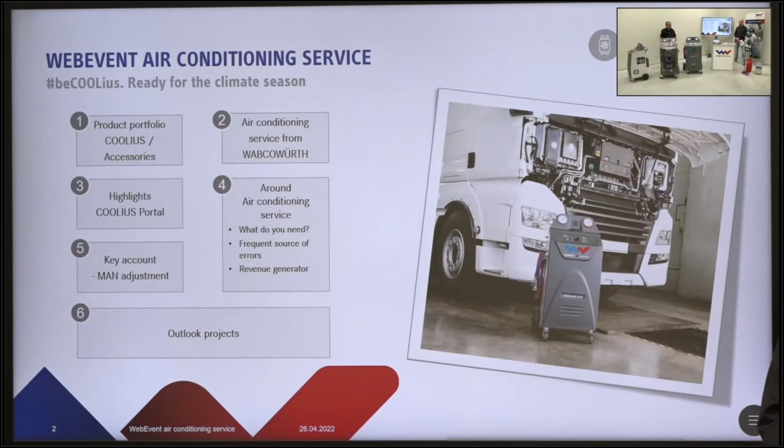Before we start, Uwe, can you tell us why it is very important to do a service job on the AC system? This is a very good question, Marvin. I'll try to answer it in short. Everybody has a fridge at home, and I'm frequently asked why I need to do a service.

I never do anything at home to my fridge, even after 20 years, I just turn it on and let it run. That's true, and at the same time this is the reason why there is a core difference. We have a so-called open system, an open structured system fitted into a passenger car or a truck or any vehicle. In comparison, at home in the fridge, we have a totally solid and hermetic system.

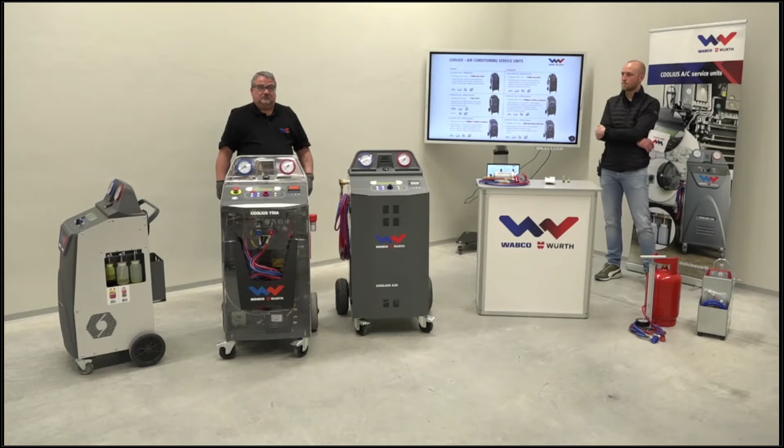Hermetic means that we have only soldered or welded connections, so this means it's absolutely tight - no molecule can escape this system. In comparison, a vehicle has many fittings on board, up to 20 different fittings, only sealed by an O-ring or a gasket, and we have a dedicated loss of up to 10% of the refrigerant per year, which means we are losing the refrigerant.

At some fine day we will not be able to operate the system again. And at the same time, as we are losing the refrigerant, environmental air, including humidity, is entering the system and accumulating water inside it, which gives another problem because we are producing acid, and the acid is of course also harming the system from within. So we have changes in the chemical composition, which lead to a lower cooling performance overall. So a lot of problems will happen.

And we have a filter dryer, which is only dedicated for a small lifetime because it only can absorb a certain amount of water and filter a certain amount of particles out of this refrigerant until it is saturated and needs replacement. So this is, in short, why we need to have service to a mobile air conditioning system.

Everyone who works in a workshop has heard about the refrigerant. What is the background behind the refrigerants? Why do we have two on the market? And what will the future bring?

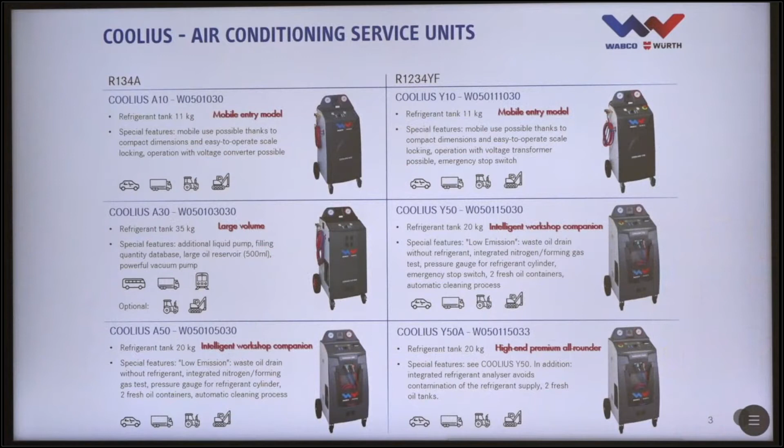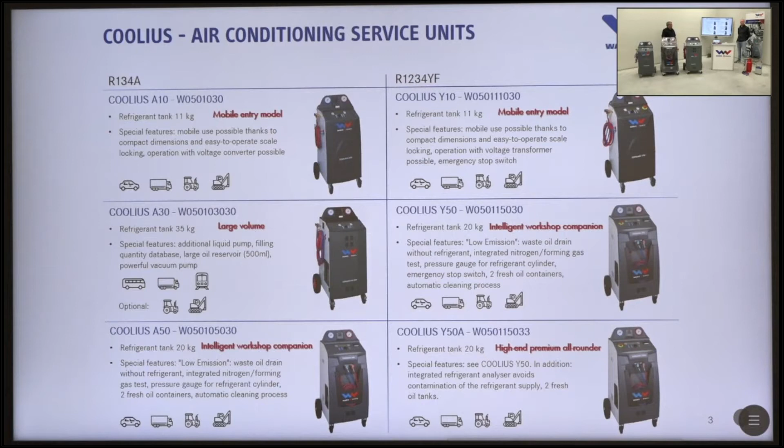Another important thing regarding AC service in general is having the perfect or suitable accessory. We at Wabco Würth have a lot of accessories in the portfolio, and we will present you today the most important ones. For example, we have a flushing kit.

Uwe, why should we have a flushing kit? Why is it necessary for the workshop, and when should we use the flushing kit?

I would even start a little earlier. When the vehicle comes into the workshop, we already need accessories. As mentioned earlier, we have these small identifiers, for instance. Identifiers are necessary to really make sure that the vehicle I'm about to service now has more or less adequate refrigerant on board.

Then, analyzing this refrigerant, I would also strongly recommend using a simple looking glass cylinder, which gives me the opportunity to look at the appearance of the refrigerant and the oil. This gives me information about the amount of oil, the oil-refrigerant ratio, and whether it's still within the permitted range. I can also make sure I'm not having overheated oil, which changes color to brown or black running around in the system, because from that moment we are not talking about a simple service, but a full-scale repair.

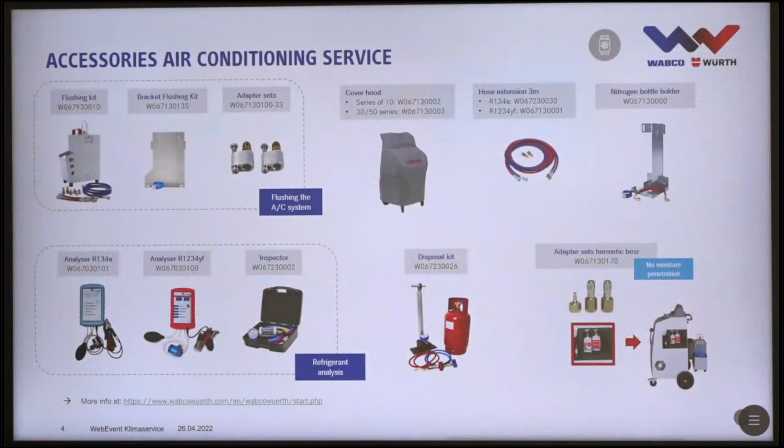And if we are talking about wasting refrigerant, we also need to have this disposal kit.

Yeah, this would be for me the basic equipment before I start to offer AC service in a professional way.

Let me add some information regarding the flushing process. We have the suitable adapter set for bypassing the compressor in our portfolio. You will find more information about the flushing process on our homepage, which I'll add here - why it's necessary, as Uwe mentioned, and which adapter set you need for which compressor type and which car or vehicle type.

Yeah, we have some other accessories, for example the cover hood and the hose extension. The hose extension we need, for instance, if we do the job on a construction machine or an agriculture machine, because there the AC system is very hidden and partly roof mounted. You need to take a ladder to go up on the roof and really reach the system, so the standard 3 meter hoses are not perfect - you need an extension.

Then, as you see here on the Y50A, we have the nitrogen bottle holder on the back side of the Y50A.

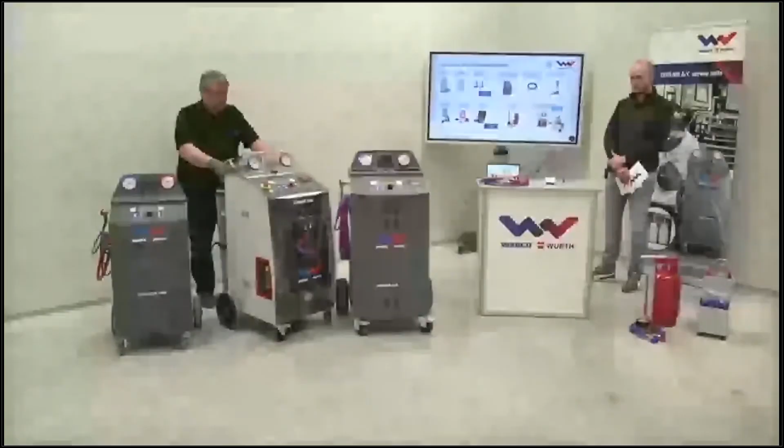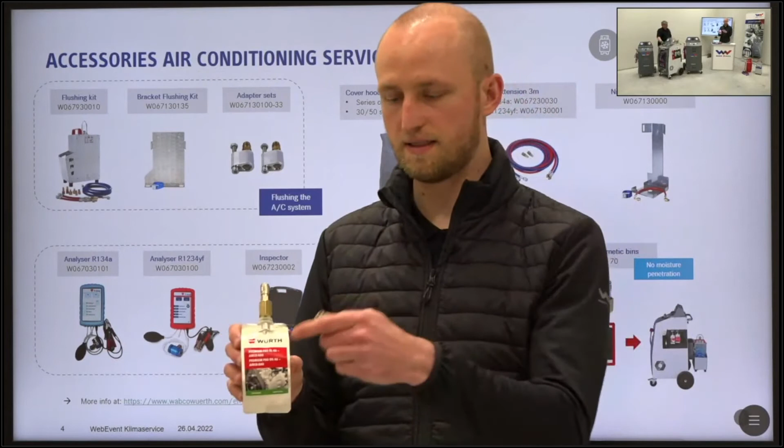And one very important new accessory is the adapter set, or adapter sets, for the hermetic bins. The hermetic bins come from our partner Würth, and with this adapter set, which I have here, you can fix the hermetic bin directly to our machines. The adapter set consists of 3 adapters - one for PAG oil, one for POE, and one for UV dye.

Let me show how you can fix the echo bag, as we call it internally, to the machine. Remove the old oil bin, and then you can mount the new one through the adapter directly to the machine. You can do this with PAG, UV, and POE.

And the biggest advantage of this solution is that no moisture will penetrate into the AC system. Because if you have moisture in the AC system, the conductivity will increase, and this means the oil will not be usable anymore.

But you've mentioned another very important thing that saves a lot of labor time, because part of the preparation is to daily check the container and dispose of the oil which isn't okay anymore, which has collected too much humidity. With this solution, you can leave it there until it is empty.

Yeah, a mixture of refrigerant, moisture, and oil will lead to a substance, and this substance is very dangerous for the components in the AC system. Absolutely. So these adapter sets are now available here at Wabco Würth, and I think this is a very good solution, also regarding e-mobility.

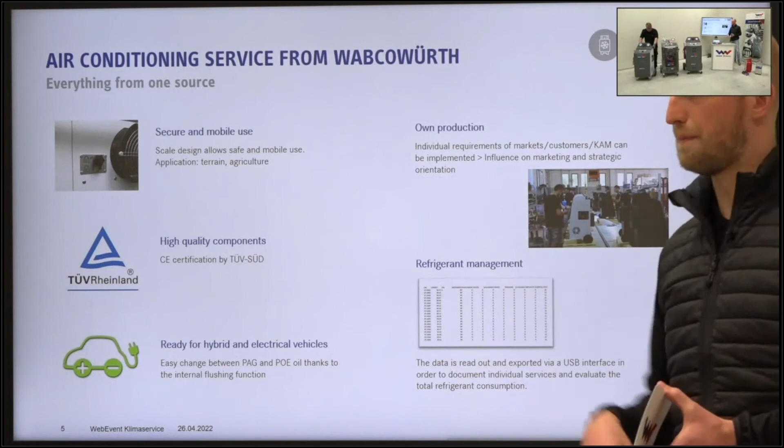So far for the accessories. What we've forgotten now, Uwe, is the secure and mobile use of our devices. We have on the back side a scale design with this scale locker - we call it scale locker. You can unlock or lock the scale inside the device.

Yeah, exactly. This is a very simple and tool-free solution which can be used at any time you like. So this means if I put it upwards here, I lock it, and now I can go over a bumpy road or a bumpy yard.

I can transport this device on a van, on a bad road, without harming the scale, because the scale is rated 60 kilograms. If I give it too much shocks, I can damage this scale transducer, and in this case I can avoid this. And now you see, within 3 seconds, I'm operable again.

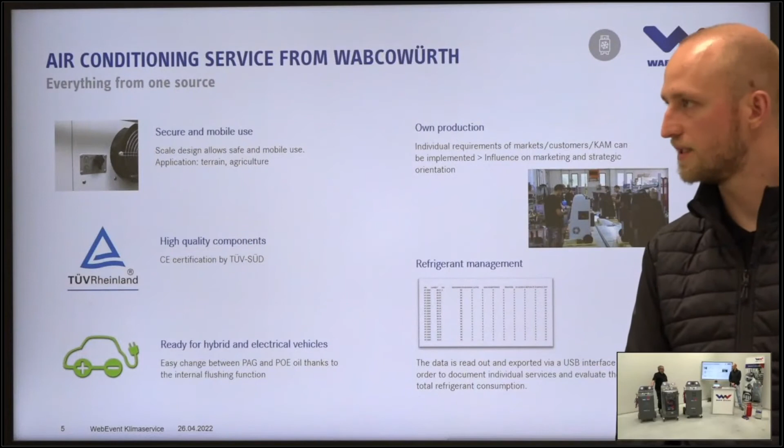Furthermore, we have very high quality components in all of our devices. We are certified by TÜV Süd, and as Uwe mentioned, we are ready for e-vehicles and hybrid vehicles because we have the internal flushing function.

Then, what we also have is our own production in North Italy. That means we can fulfill the requirements of the market and of the key account. We can customize the products - for instance, the MAN product, which I will explain later.

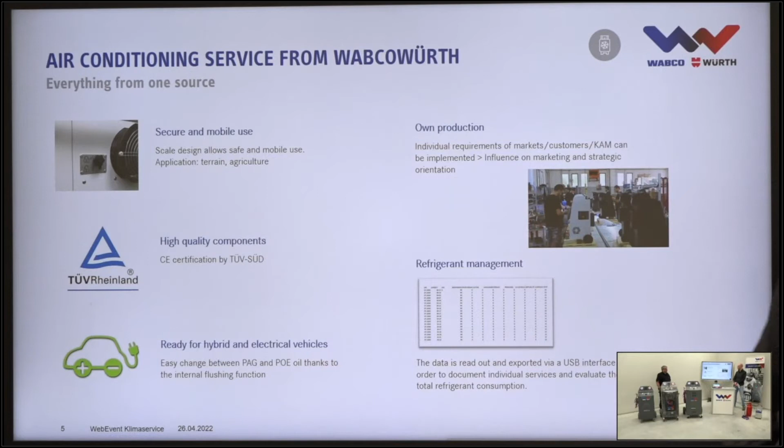And we have integrated refrigerant management. With this function, you can document the service jobs, how much refrigerant you use per service, and this is also important for regulation.

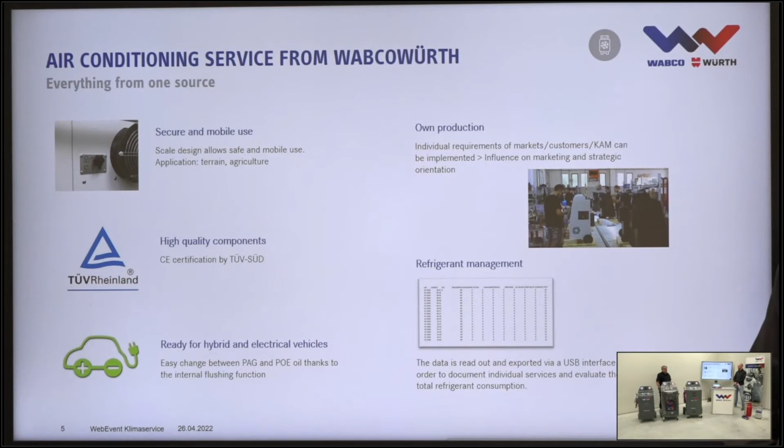We have two big points here: we can of course fulfill all the environmental regulations, and we can do a full cost calculation, because you can sum up all the refrigerant purchased and see what you have sold out - this is, I think, very good transparency for the accountant. Of course, yes.

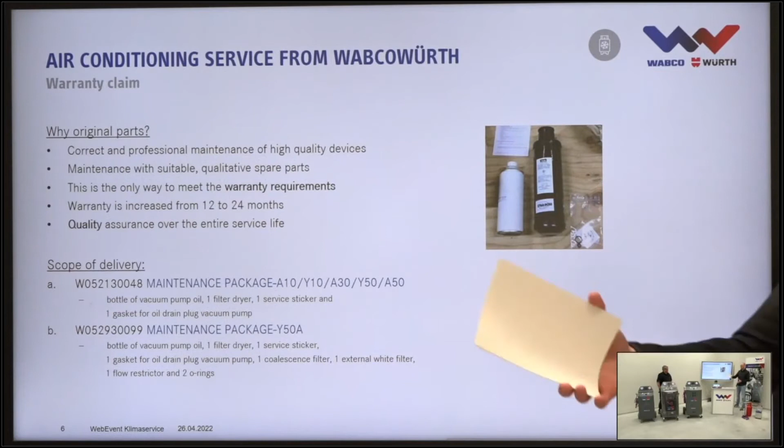Another important point is the warranty claim. Why should you sell the original parts from us, from WabcoWürth? A high quality product like the AC machines needs maintenance, and with our maintenance package you can carry out a correct and professional maintenance. With original parts, this is the only way that you meet the warranty requirements, and the warranty duration increased from 12 to 24 months. This assures you high quality over the entire service life of the machine.

You can order the maintenance package under the following article number, which you see here in the presentation. The difference between the two maintenance packages is only that in the package for the Y50A we have additional parts for the refrigerant analyzer.

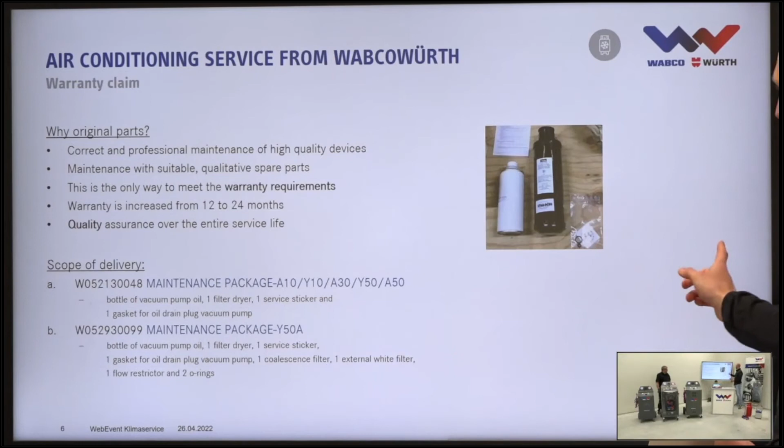Now, what is very important for you is the COOLIUS portal. I will show you the advantage of this portal. In summary, the portal is a cloud or web browser where you can find a helpful overview like the manuals or instructions. You can find an overview about the spare parts of our AC machines, and what is very important, you can download the current software update and generate maintenance and flushing codes.

With this access you can generate a flushing key, you can generate the maintenance key, and you can download manuals in different languages. You can see what the current software update is and compare this update with the update on the machine, and then you can download the update and play it on the device via the USB port.

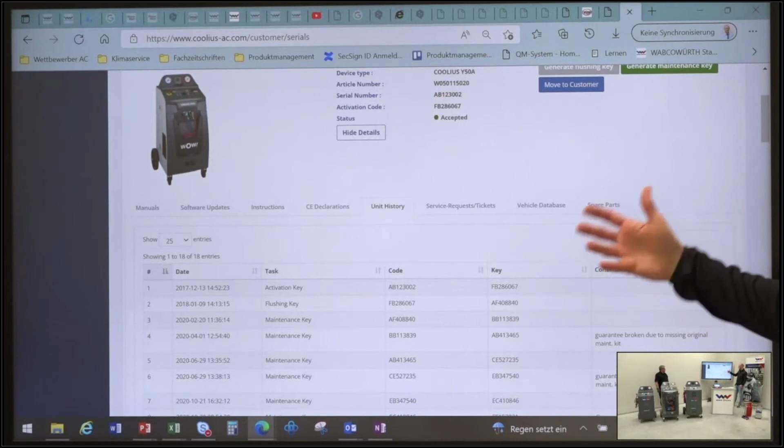Here you have the options to download different instructions, for instance the instructions of the flushing kit. You can download CE declarations, you can see your unit, and you can see your history of the generated keys - for example, how many maintenance keys I have generated in the past, and things like this.

What is also important here is that you have a direct link to the parts manager. Here you see the parts manager of every device, A10 to A30, and you can order the spare part directly here if you need it. So far, that's our COOLIUS portal.

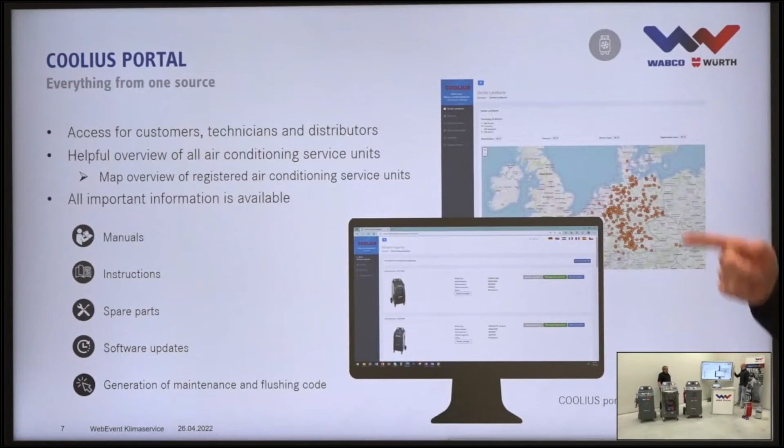Shouldn't we mention the bus database as well? That's a good point, Uwe, of course. Let me show you this function.

If you have an A30, let me show here, you have the opportunity to select the right refrigerant quantity and the right oil type. This depends on the AC system built into the bus - you can select your AC model, your AC manufacturer, your bus model, and the bus manufacturer, and then it shows which combination of the AC system is possible. We are very often asked why we do this on the web and not on the machine.

You see, we have in total more than four different search items, which is necessary because the variability on a bus is comparable to a building. You can build into your building whatever kind of heating plant you want to have, and the same situation applies here with the buses.

This means you can configure such a new bus really according to all of your needs. You can change the cooling performance - you can have only the driver's cabin cooled, or you can have everything cooled, and this makes a very high variation, which is why this database is really unique. We cannot, of course, do this on a simple device like an AC machine.

But here, this is absolutely adequate, and you have access at any time of the day to find the right system, saving lots of time searching the web or asking dealers or whatever. So it's a very good opportunity for you to find the right refrigerant amount and the right oil type.

Here you see the most important consumables which you need for a first air conditioning service: of course, the right refrigerant, the right oil, and the adapter sets for the extraction of the refrigerant bottle. And as you see directly on Uwe, the personal security equipment.

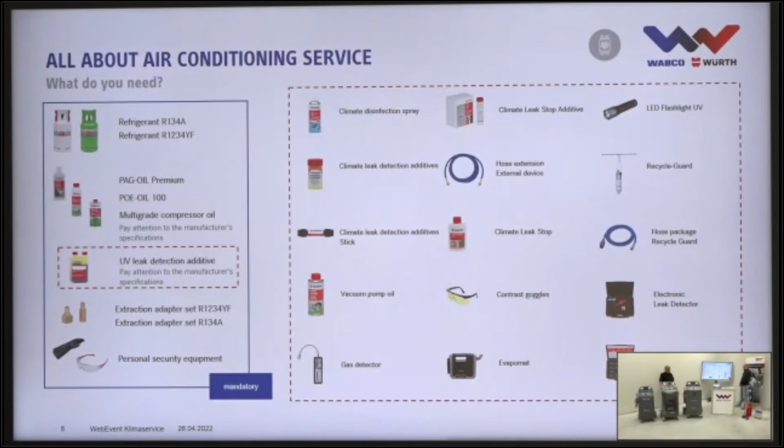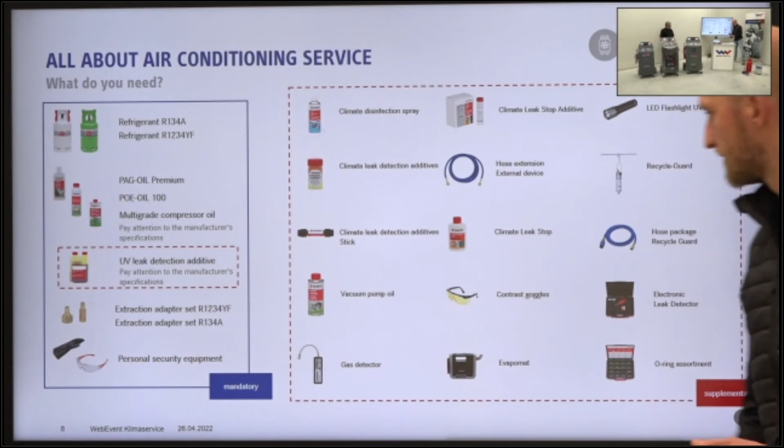Then we have other supplementary accessories in the portfolio of WABCO WÜRTH, for instance things like the leak stop additive. We have accessories for leak detection, and the Evapomat is for the purity in the cabin of the car. The gas detector, for instance, is to detect the forming gas if it comes through a leakage of the AC system.

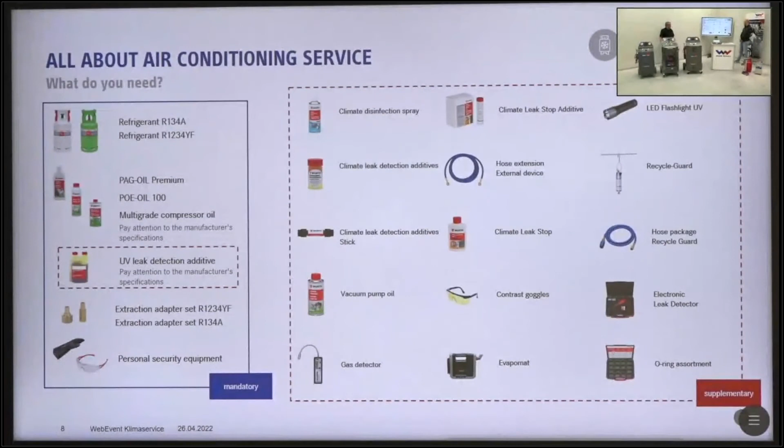Yeah, if you're a beginner in the area of AC service, you ask yourself what is most easily damaged, what I can do, or what can occur. So Uwe, can you tell us what are the most frequent sources of error which will occur if you do the job?

Of course, there are opportunities to do something wrong. Today not so much, but in the past there were issues. You need to have the certificate of expertise or competence, which is mandatory according to the EC regulation, valid in all countries of the European community. So the certificate should be with you, otherwise you risk a very high fine. Because in this expertise, you are taught how to handle and treat this refrigerant, and what safety measures for personal and environmental safety are necessary.

Always work with protective equipment, because this refrigerant has a very bad impact on your health if you swallow it, breathe it, or get it into your eyes. You need to immediately see a doctor, and you can be happy if no further damage has occurred.

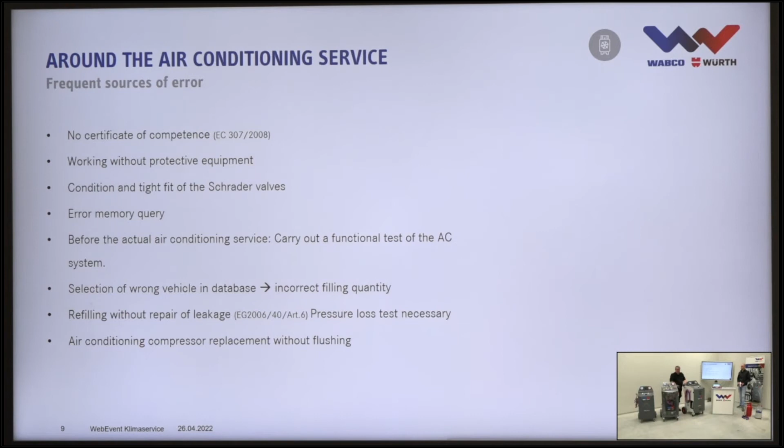You should also observe the condition of the Schrader valves - we have the service couplers here on the parking position, also on the passenger car or any other vehicle. Make sure this is not the source of a problem, you should always check if it's dusty or if the protection cap is missing - we need to clean it before coupling on and starting the service. Otherwise you transport substances and particulate matter into the system which definitely does not belong there.

Also check whether it is fitting tightly, use the special key and tighten it if necessary, because this is also a source of error, very often overlooked. If you disconnect the vehicle and the customer leaves and comes back after 4 weeks, the further issues are all on your expense because you have to grant warranty.

Before we do anything on the passenger car, it's not always about the refrigerant amount or quality. In the meantime, every AC system is controlled by OBD, so we should also check the fault code memory for anything unexpected. Because if you do the service with the machine, the customer naturally expects the AC system working properly after visiting the workshop. If there's a problem requiring repair rather than just service, we should have the information first and discuss this with the customer before any damage happens.

The condition of the system as such should be checked in best practice together with the customer. Go there with the customer, turn on the engine, turn on the AC at full performance, check the blowing temperature, then evaluate together with the customer which corrective measure needs to be taken to get the system back into full operation. Transparency is very important.

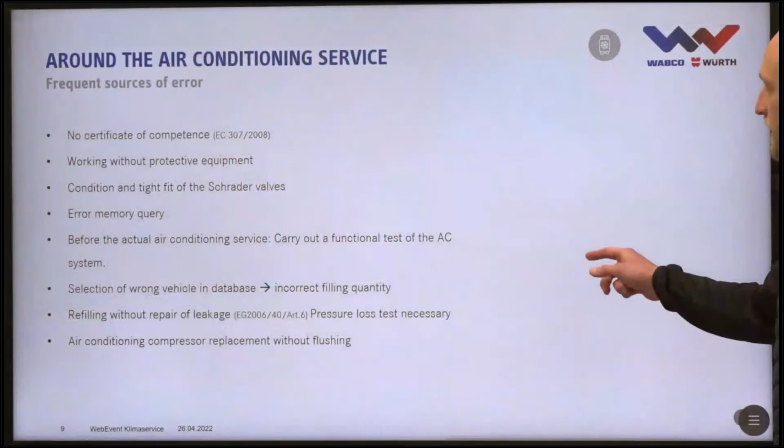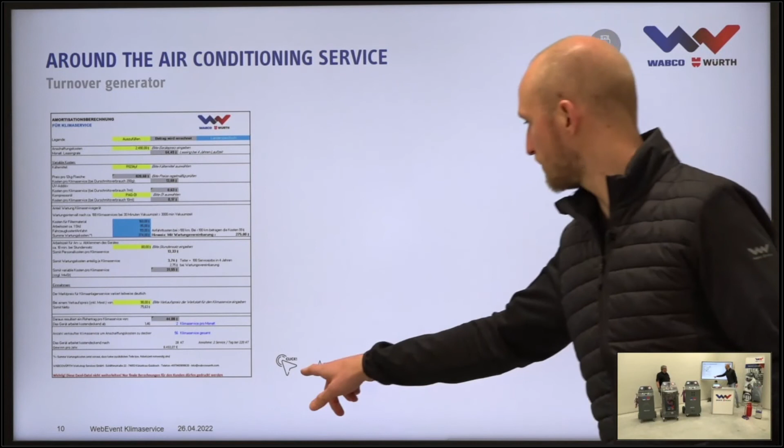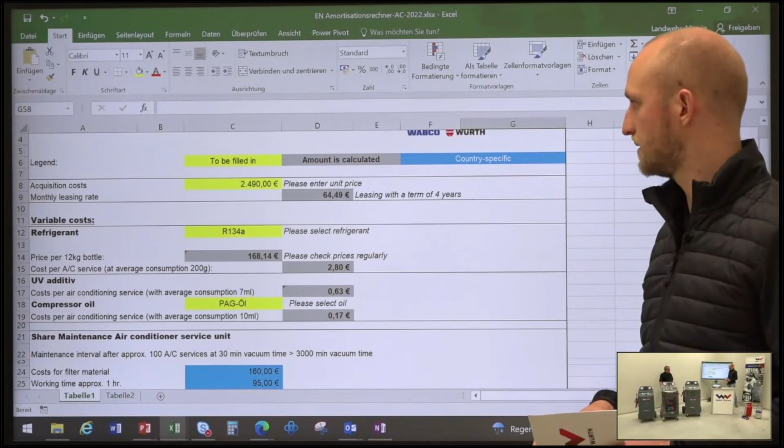Then in the next columns you have the variable costs. The variable costs consist of the refrigerant, the UV additive, and the compressor oil. But the amount of the UV additive and the compressor oil is much lower than the amount of the refrigerant. Then you see the cost of maintenance of the air conditioning machine.

As we explained in the presentation before, maintenance is very important, so that means you have maintenance costs. You have cost of the filter material, cost of the working time, cost for the drive of the worker, and that leads to the total cost of maintenance.

But if you have a maintenance agreement, for example with a technical field service, then you only have to pay 275 euros, which is a little bit lower than the total maintenance costs without a contract.

Then you also have to consider that you need money for the working time directly in the workshop for the workers. Here we calculate with an hourly rate of 80 euros.

If you need only 10 minutes on average per AC service, because the AC machines are all fully automatic, you only need time to connect and disconnect the quick couplers. That means you need only 10 minutes, and this leads to a cost of one air conditioning service of 13 euros.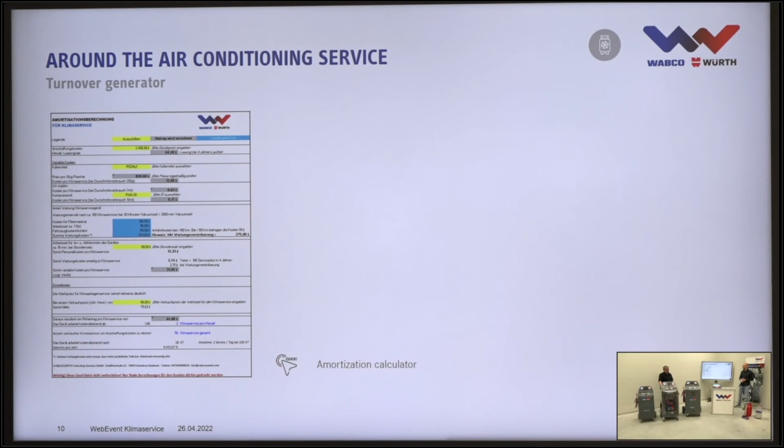Now we come to the key account projects, and as I mentioned, we have adjusted our Y50A to the requirements of MAN.

The adjustments are the following: we have only one oil connection because MAN wants to work only with PAG oil, and this PAG oil should be hermetically sealed. That's the reason why we use our hermetical pins, which I showed you before. We also have special quick couplings on the machine with a special safety valve and the cover hood included.

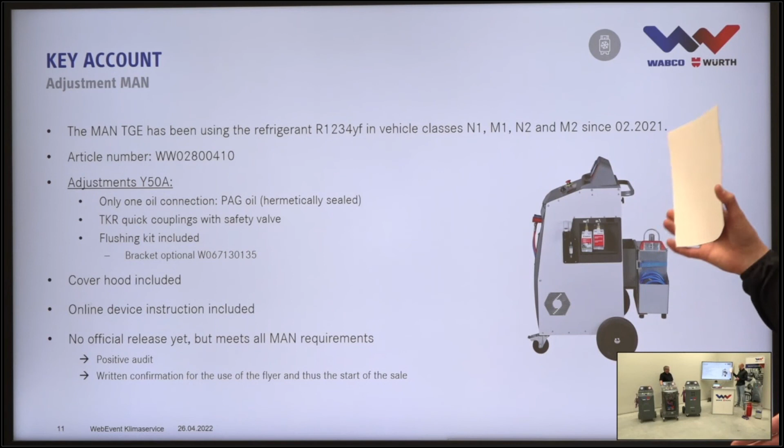What I have to mention is that we don't have an official release from MAN yet, but we are currently working on this. We meet all MAN requirements, which means we get a positive evaluation if the device comes to an audit. And we have written confirmation from MAN Germany that we can use the machine for the MAN companies in Germany, and we can start our sale.

So this is also important for the international MAN service partners.

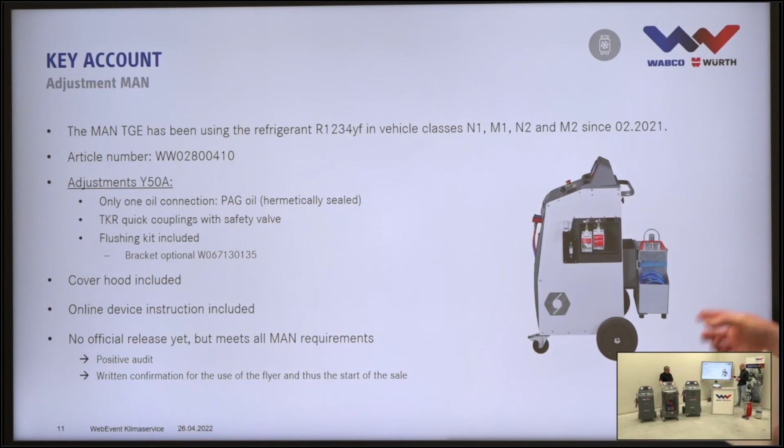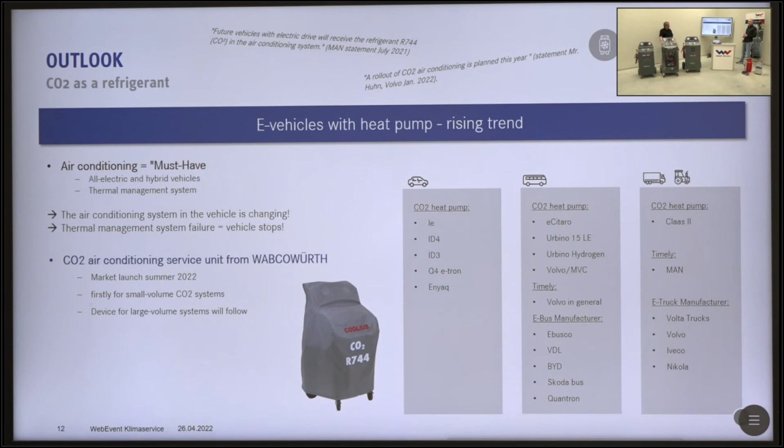Another important future project here at WabcoWürth is CO2 as refrigerant. You know, the air conditioning service up to now was nice to have, because with the air conditioning system you only cool the cabin of the vehicle. But today, regarding e-vehicles, you use the air conditioning system also for cooling the battery management and its components. That means if the air conditioning system fails, the vehicle will stop, so it becomes much more important.

At WabcoWürth we are working on a machine solution for the application of CO2. We will start with the machine in summer this year. We are developing, as a first step, a machine for small volume application, and after this we will also develop a machine for large volume.

Here you see an overview of which vehicles, cars, trucks and buses up to now have a CO2 heat pump. You see there are already a lot of vehicles with CO2 heat pumps, and it will become more and more important in the future.

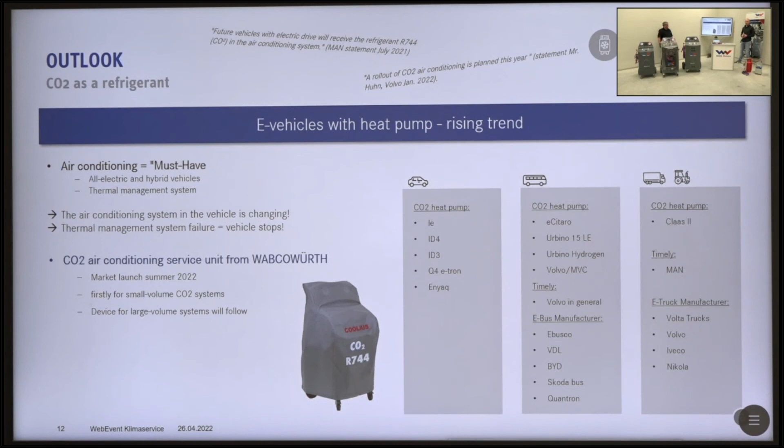Another important project we are currently working on is connectivity. What is the background of this? Internet of Things and digitalization is not only a topic in industry but also in the workshop. That means the devices in the workshop will talk together through Wi-Fi or Bluetooth, and this is the current market trend.

So we have on a cloud or website callable real-time data, such as refrigerant consumption or oil consumption, and we can send service orders directly from the cloud or website to the machines. For example, you can say, okay, please do the vacuum job.

We at WabcoWürth divided the project into three steps. In the first step we focus on hardware development. The hardware looks like this prototype here: a USB dongle, and with this dongle you can easily connect directly to the USB port.

If you connect the device with the dongle, a virtual website is generated. From this website you can show every function that you see on the display of the device, also on the homepage and on the cloud.